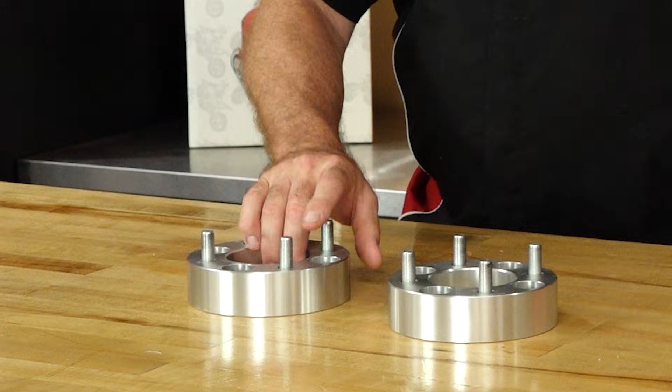So you've decided you want to modify your machine just a little bit. You just want it a little bit wider to where you've got a little bit more stability and control when you're out on the track or trail. A simple way to do that is just to go with a wheel spacer. It pushes out the entire wheel and rim a little bit further than stock, and that'll accomplish what you want. But there's a trade-off there. By doing that, you're changing the geometry, not so much in a turning aspect, but in a momentum aspect, either when you're accelerating or when you're braking, one of those two.

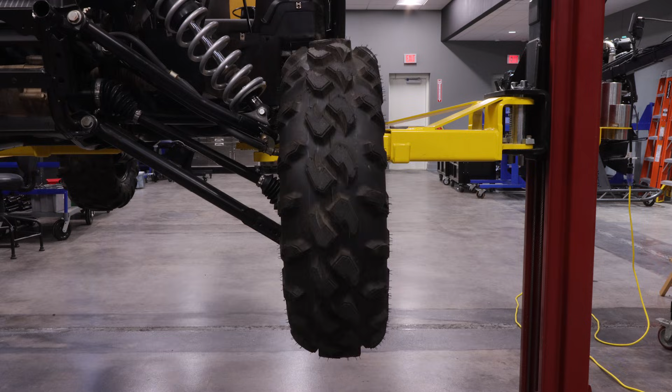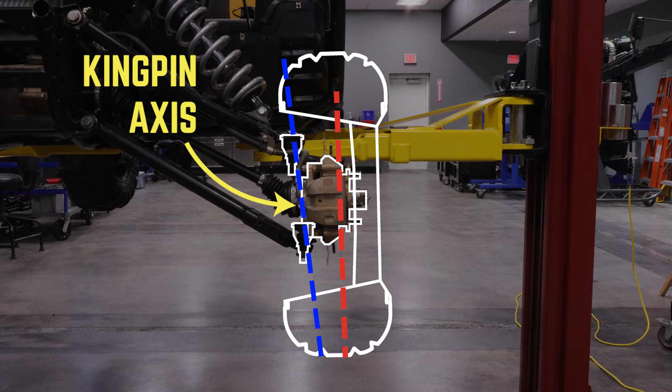So which forces are we talking about here? If you take our YXZ1000R and you draw a line directly through the center of the tire, hopefully that aligns with the wheel center, the wheel bearing center, bring that straight through. Now take another line from the top pivot point of your suspension to the bottom pivot point, and this is actually called the kingpin axis. Bring that straight down until it interacts with the outside of the tire. Now that first measurement at the wheel center is called a kingpin offset.

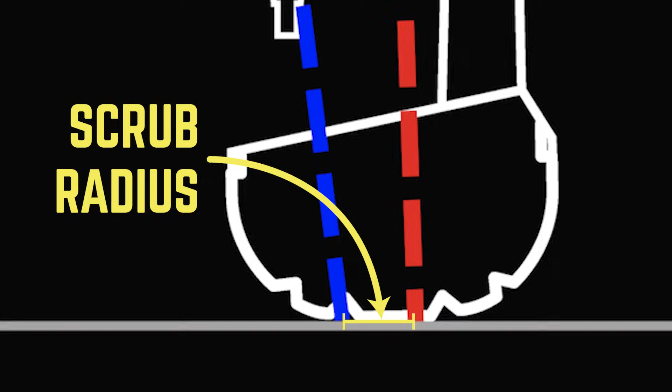Now the one that we're really concerned with is the scrub radius, which is down at the bottom. That is the distance between that center line and where the kingpin axis intersects with the ground itself, or the outside of the tire in this case. In most of your double wishbone suspension, that's usually going to be a positive number. The only time you could have a negative is if you had a really large diameter tire, or you're talking about a MacPherson strut setup. And for the most part, that's just going to be in the automotive world.

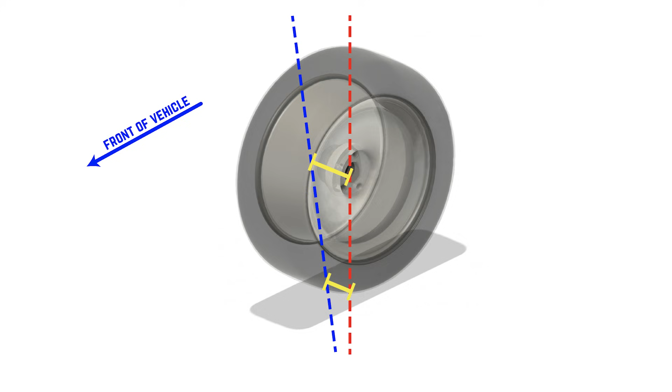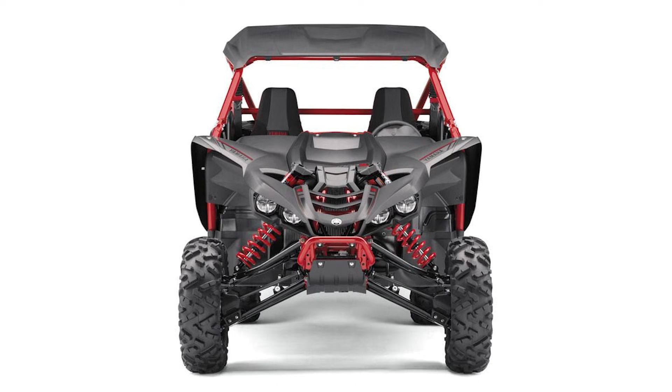Now the offset and scrub radius, they're really important when you look at moments of inertia, when you're talking about braking or acceleration. And this actually creates a torque that tries to steer the machine one direction or another. Most of your positive applications, it's going to be a toe out. In other words, your left tire is going to pull left and your right tire is going to pull right. Now, do you feel that when you're accelerating or braking your machine? Probably not, because what's happening on your right side is counteracted by what's happening on your left. So it may be straining, but you don't feel it in the steering because it's going to be braking evenly.

Now how can you tell that that's really there? Have you ever had one wheel where you had it on the road or some type of good surface and the other side was on ice? What happens? She pulls. That's the force I'm talking about. Now, every machine's going to have a little bit of that. I mean, I can't think of one that has a completely zero scrub radius.

That just doesn't happen. But what happens is when you add in a spacer, it's changing that dynamic a lot. And you may not be able to feel it, but I guarantee you your machine does. And when it does that, it's putting an extra strain not only on the suspension components because you're further out, but also on the bearing itself. Now when you look at our YXZ1000R, it has a moderate scrub radius distance. You add in a spacer and look how that dramatically changes.

That is going to increase the amount of wear on your bearings as well as your suspension and your controls. And it's also, believe it or not, going to change your spring rate because your tire is effectively further out and has a more extreme leverage on the springs of your suspension.

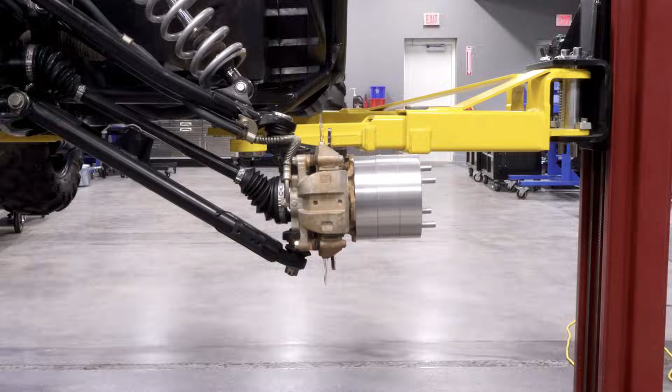Now, looking at one that has a ridiculous amount of spacing, that will put a tremendous strain on everything we just talked about, and it makes it visually easier to see when you exaggerate it this far. I realize not many people are going to actually space theirs out this far, although I have seen it.

It's not uncommon for different kits to be either a 1 inch, a 1.5, or even a 3-inch chunk of aluminum that they have you bolt to the front of the machine. I would not recommend, nor would I put, a 3-inch spacer on the front of any of my machines.

Now, if you're absolutely convinced that you need a wider track for your machine, I would recommend that you go with extended control arms as well as the associated drive shafts. That is going to keep your geometry the same and the machine performing as it should.

Now, the one caveat for that is you will have to change your spring rate, because you're still pushing out everything further, so it's got more leverage against the springs. So take that into account if you're going to go that route.

Now, let's swing back to the spacers themselves. Is there anything substantially wrong with just doing a moderate spacer on a side-by-side? No, I don't think that there is. Just keep it under control, keep it to 1.5 inches or less. That way you won't run into really severe complications.

One other note, not on every machine, but on a lot of your higher speed machines, you not only are centering your wheel on the lug nuts itself, but it's also going to have a centering ring in the middle. And if you put on a set of spacers that does not project out that centering ring, you're going to run the risk of it being out of balance.